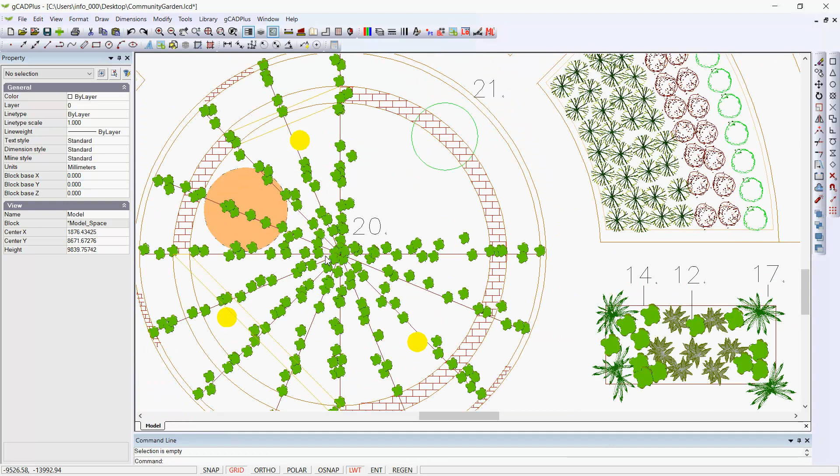Here's a design for a community garden. If I wanted to zoom in on the centre of the circle, since the design is based on a circle, I position my mouse near the centre and roll the wheel away from me. That zooms me in or magnifies the drawing. To come out, roll the wheel in the opposite direction.

This is a very complex, big drawing, so it takes a little moment to catch up. That's the simple zoom, and you can reach that command via the View drop-down menu, with some alternative options there. You can also zoom by right-clicking and picking, say, Zoom Window, then put a box, and whatever is inside that box is zoomed.

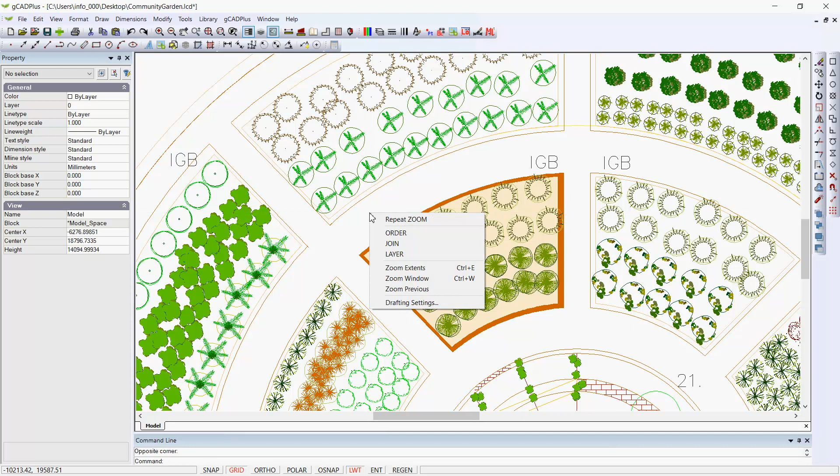You can say I want to Zoom Previous, and in this case you zoom out. You can also pick Zoom Extents, which pushes you out to show the whole design at its maximum. So zooming in and out uses the wheel of the mouse.

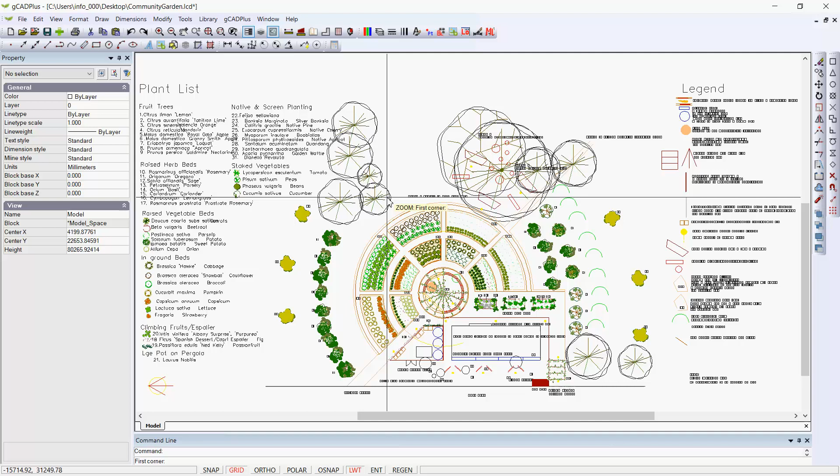Nothing is selected at this point. You get a different result if entities are selected. Let's zoom in with a window, putting our box like so. We don't have to draw the box from left to right—we could zoom a window going from bottom right to top left, and we've zoomed in.

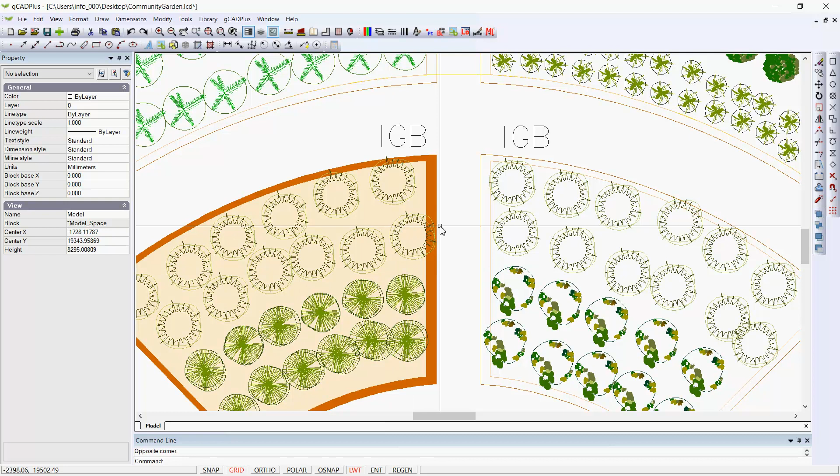Now if I want to pan the drawing, which is equivalent to putting your hand on the screen and moving to the side, I hold the wheel of the mouse down and drag. I can combine these: I'm zooming out with the wheel, then I'll hold it down and move in that direction. So zoom and pan in combination work nicely to control your view.

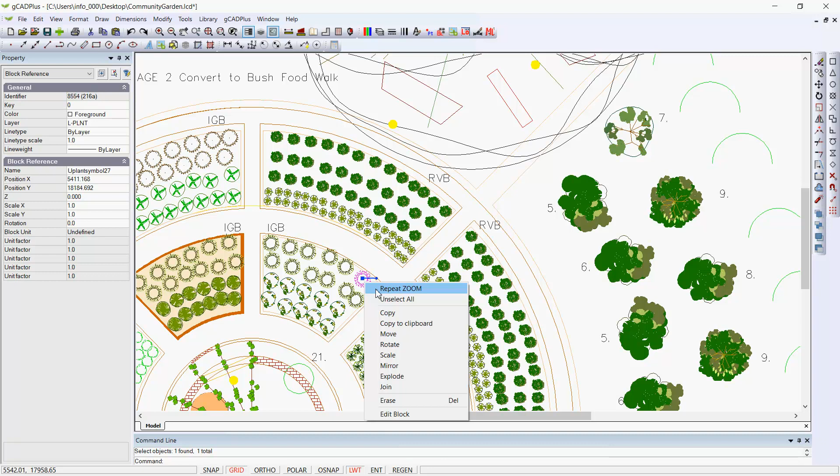But you do have to pay attention to the selection state of your drawing. If I pick an entity like that and right click, the Zoom Extents and options we saw earlier have now disappeared, because the intention here would be to move it. I could move that particular symbol from there across to here, and we can stop.

I'll right click and unselect all. So gCADPlus behaves differently whether you have something selected or not.

And the zoom and pan commands are transparent. It's a silly example, but if I say I'm going to draw a line, I'll jump to that corner by picking an entity snap like so, and I want to go to this corner, to the other corner. Let's imagine I'm finding it difficult to locate, because I'm zooming in but I'm still in the middle of a command.

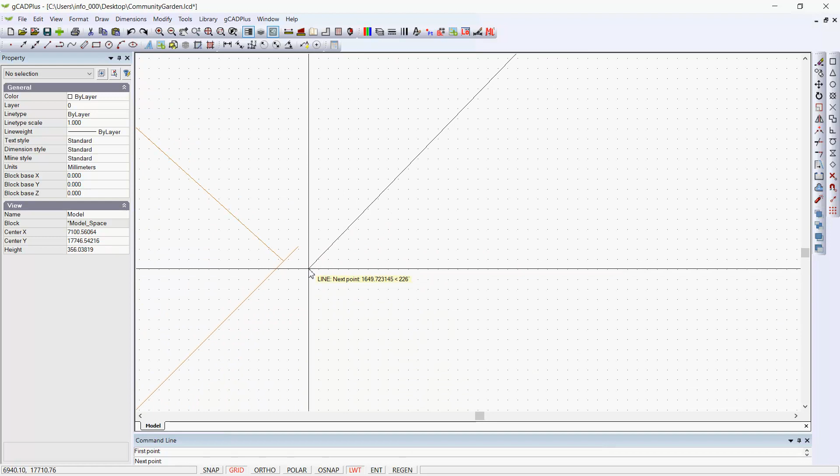I can find, say, the end point of that line by clicking on what's called an O-snap, and I can grab it like so and exit. Can you see that zooming and panning are transparent to other commands?

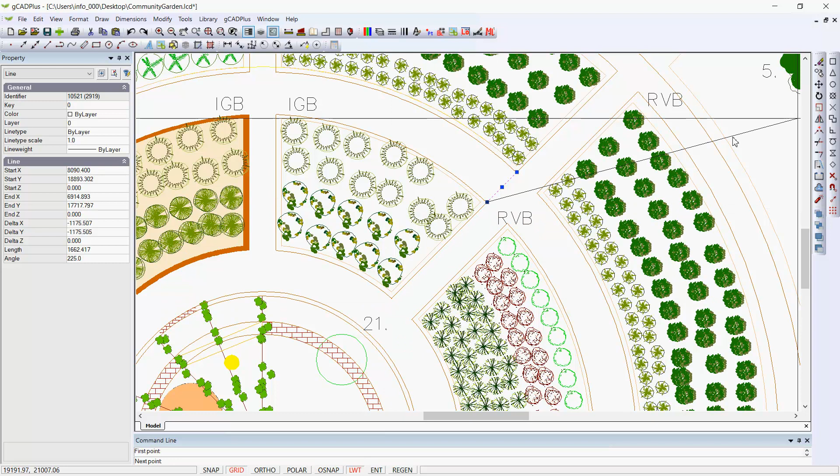We could select, if we wanted to, that line which we might have put on, say, an irrigation line, and then draw another one, going from the end point of the line we just put in down to this end point. A bit hard to see, isn't it?

So I can zoom in and find the end point that I want, and exit. The two lines I've just drawn, while working my pan and zoom in concert with those commands, are now highlighted, and I can move them onto an irrigation layer, change their line type, or whatever.

So managing your view of your drawing and the operation of the commands is something you just need to practice, but the wheel of the mouse and the mouse buttons are crucially important, and you need to practice a little bit.